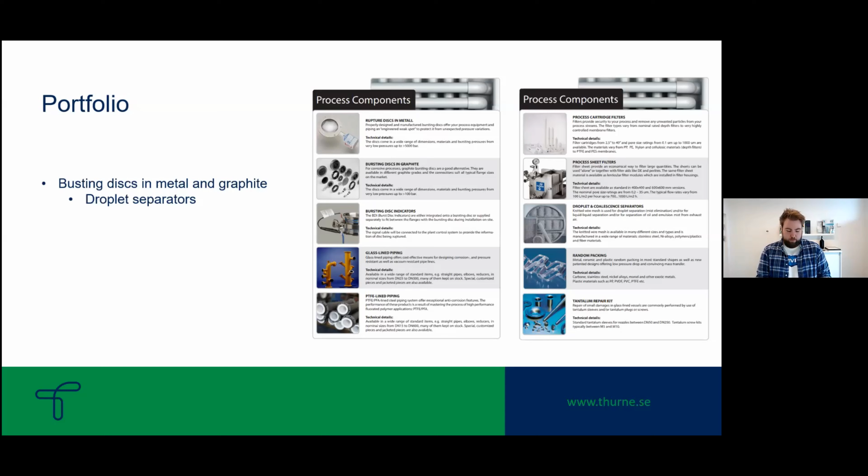Also something about how Thurne works, or how we work at Thurne, since I'm a product sales manager. I usually have a project with the customer, or the customer comes to us, or the supplier comes to us, and has some questions, some problems that need to be fixed. Just something that will need expertise in different areas. And then we are perfect for that because we are the experts in these areas.

So we sit down with either the supplier or the customer. We work out the identification of the problem. Then we can find the definition and criteria of what we want to achieve. What is the goal here? What is the purpose? And after that, I will work together with the supplier to find a solution. And in my experience, this solution usually needs a revision from the customer. And then it's ready to be shipped to use.

And also we get feedback later on, if it was a good solution, or it needs to be changed, or if we need to copy and paste this on some other parts of the plants. So moving on to our first supplier. We're going to talk about CDC, the Continental Disc Corporation. They were founded in 1965, and it's an American company. They're located in Kansas City, Missouri, even though they have plants all over the US. Their headquarters is in Kansas City.

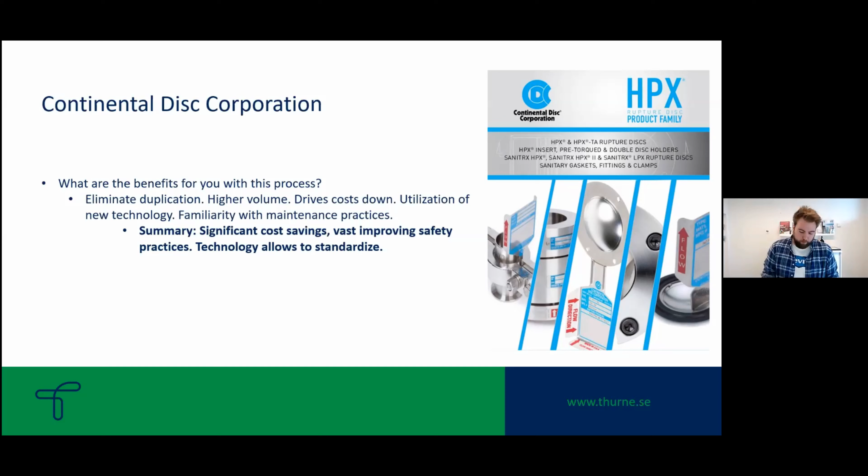So not just standardization with cost savings and improving the safety, but also very specific cases where we can make a special design just for this position to really get the high safety and a good value for the product. So let's move on to some of the case studies. So the benefits of this process usually end up in a better solution, or a higher volume of discs that will drive down the price, and utilizing new technology.

And this is a good way of showing the different types of technologies that can be implemented, and also customized technology. All of this just to make the safety better, to make the cost savings better, and also save lives. So this was for one of our customers. We developed a special disc where they had a hard time fitting it on the connector, the ML Connect, which was sitting on the tank for the batches.

And in 9 out of 10 cases where the disks rupture too early, it's usually how it's mounted. So if we could find a good way of mounting this disk, it would be much easier for the customer to install the disk. It will be a good seal, a good fit. It will work longer and longer, since this type of disk will work around 3 million times before bursting. So you can do 3 million cycles with this disk, and it will still keep 95% of the operating ratio.

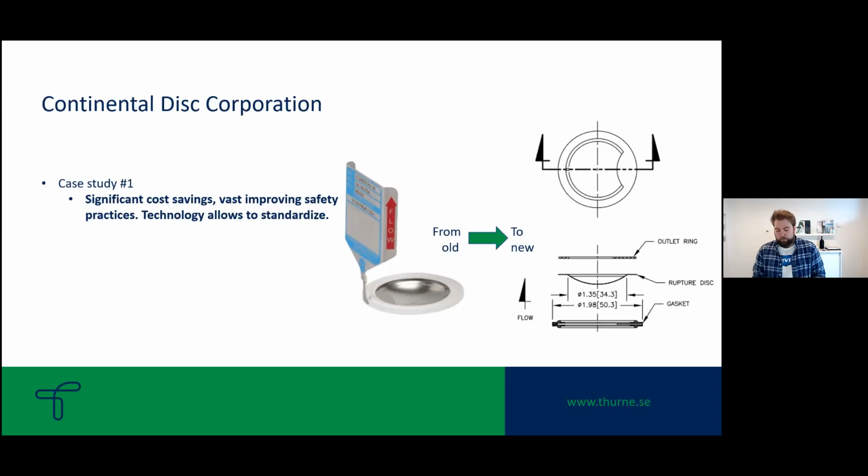So in conclusion, we developed a unique disk which met the criteria the customer had. They wanted to improve and last for 3 million cycles. They also wanted to have an ease of installation, which is also a criteria which HPX is great for. And in the end, it was about money as well. They saved a huge amount of money. Several batches were not ruined. It was fast for them to replace a disk if something broke down. And the customer was actually very happy with this solution.

We look at another one. This is more of a unique one. This is also a sanitary disk, very similar to the old one. But we did have some unique cracks in the disks. Actually, no one believed me when I told CDC that, yes, I have this customer, they have this problem, this is the criteria, they need to fix it. What are the solutions we can provide? And we chose to call it micro cracks because this is the first time ever. It's so unique. There's no other in the world, as far as CDC and others know, in this industry.

But there are small cracks. You can't see it with the naked eye, but if you hold it and look through a light and you poke it, you will be able to hear it, and you will be able to see small cracks. And this happens with CDC disks, this happened with our competitors' disks, so it's industry-wide. They have chosen different manufacturers, trying to nail it down to find something better. And this is an ongoing investigation, actually, on how we can make a disk that won't crack with such small amounts that it's leaking, more or less.

So you want it to be sealed and you want it to be fully open. You don't want it to have small cracks to leak, because that's not the best solution for a disk either. Then you can have a valve or something else. And since this is sanitary, it could be really dangerous for the end user if it's not sanitary.

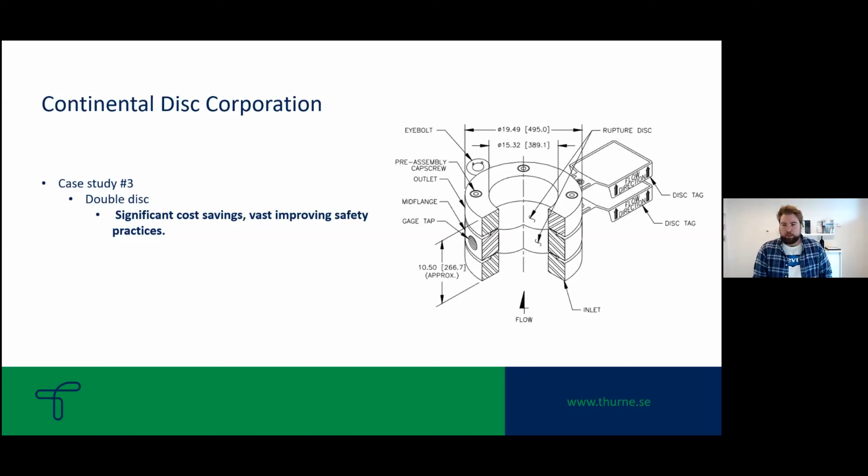We had the revision. It wasn't really a good one. It was old technology. The customer wasn't really happy, CDC wasn't really happy, and we at Thurne weren't really happy. So we sat down, had another meeting, and came up with this solution. So this is much better technology, much newer technology, better for cycles. They will last a lot longer than what they currently have. And it's a reverse acting disk, so the cycles will last more than 3 times compared to the old one. But that's the case study of those 3.

So again, why partner with CDC? Hopefully I've been able to show you why you should partner with CDC, with the case studies, and also what could be interesting in the HPX family, with the new standard in the industry. So case studies have shown that they've got the technology advantage compared to their competitors. They are leading today in rupture disk manufacturing just because they've got the technology.

And when you look at the disk, it might not be that interesting. It looks like something that you could just put on and like, yeah, it will go at 3 bars or something like that. And yeah, if it goes a little bit over or under, sure. That might be true for some positions, but you still need reliability. You still need a good seal. You still need a good solution, basically, in order to grow your business over time. And with bursting disks, it has shown in the past, and it will show in the future also. We're very sure about that.

If you choose a good disk, and if you have good ways of implementing it at your plant, your business will grow, and you are able to compete with your competitors way better than not having a good disk, a good implementation, good technology. If you have old technology, you need to have new technology to meet the new standards, the new regulations from governments, from companies in the industry. So technology is something that should not just be overlooked. It's something that you really should prioritize when it comes to bursting disks.

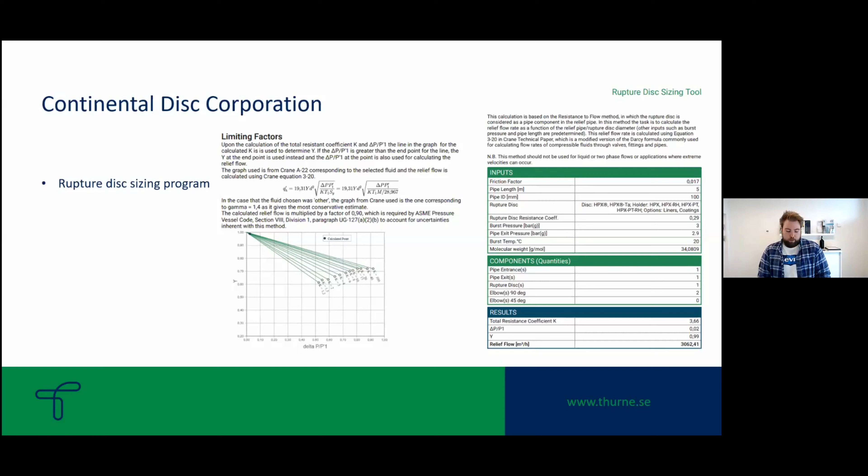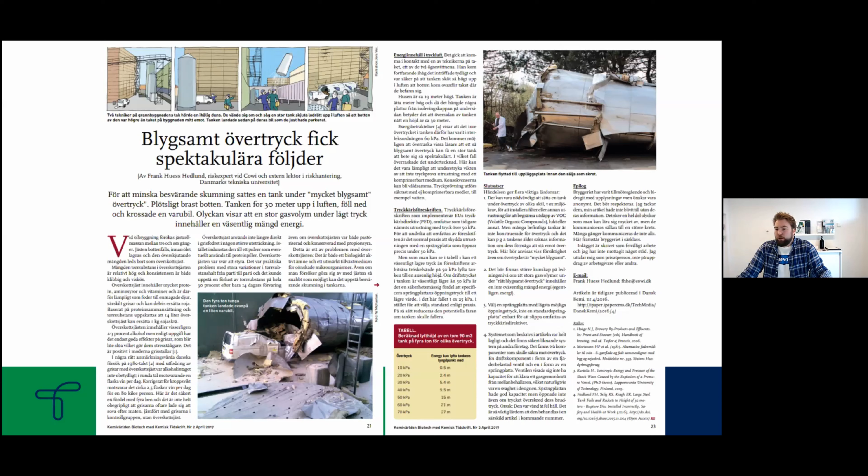Moving on to the next supplier, leaving CDC behind, moving on to Rhodius, which is the next supplier. Rhodius will be talking on the third day, on Thursday, and then you will talk to a person named Terry, and he will go through everything they do. The scope of Rhodius is really, really huge, so I will just briefly go through what they're doing and what they are, if you haven't heard of it.

This will be your first time, but they are really huge in the wire mesh industry, and the applications for wire mesh are endless, really. So to begin, in the 20s, it's a German company, and they have been with Thurne for a very, very long time. This is one of the oldest suppliers we have worked with.

So a lot of my colleagues that have been working here for 15, almost 20 years, describe it a little bit like a sacred cow for us, because we have worked so long with them. They have really been able to deliver every time. So our contract just keeps getting better and better, and we start to expand more and more on it.

So the cooperation between Thurne, the customer, and the supplier has really been close. We have a lot of old customers that have switched to Rhodius and never gone back to anything else, and kept it with Rhodius or expanded at their sites. So a quick one, what is Rhodius? What do they do? They were founded in 1925 in Weissenburg in Germany by a man named Max Rhodius. A similar story to Thurne, actually, that there was a man called Thurne who founded it.

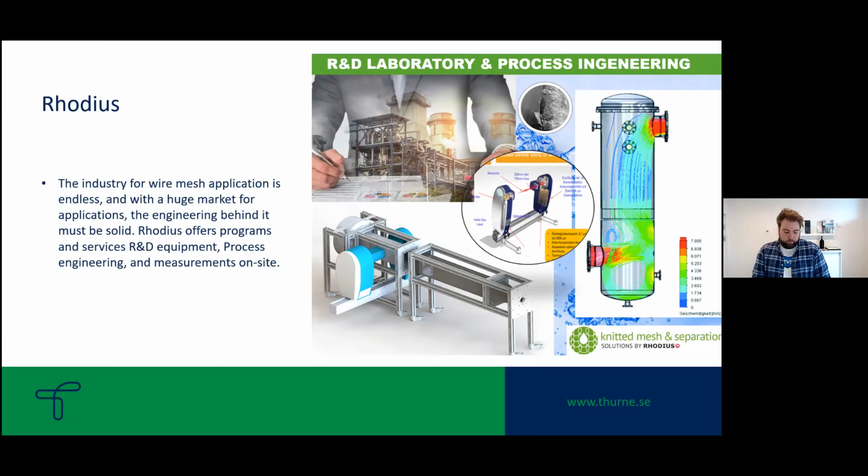So quickly, what they are doing: they do wire mesh technology, and you can implement it in so many ways. Knitted mesh in industrial textiles, on the left, for example, you can fit it on subway trains to minimize vandalism, theater seats, stuff like that. You can also have tubes with them, so you can do pipes, lines, copper cables to shield them from noise and radiation. Something that is more common for Thurne is the gas and liquid separators.

Hopefully you recognize this. This is something that sits on top of almost every column out there on the plants today, because almost everyone has a scrubber or absorber of some sort where they want to separate the gas and liquid from each other. So this is something that we sell a lot, put on top of every column, and it's one of the case studies I will show later.

Same practice as with the gas and liquid, they do liquid and liquid separation. So this is good for refineries, for example, that we have here in Sweden and Norway. Also other chemical plants, fine chemicals, that really need vast amounts of volume and need it to go fast. Then you can't wait for the laws of gravity to do the work for you.

You need to push it through some sort of filter, and they have the technology to do that. Mist eliminators are something that will be very common in cars, for example - it's the cartridges where you can slot in.

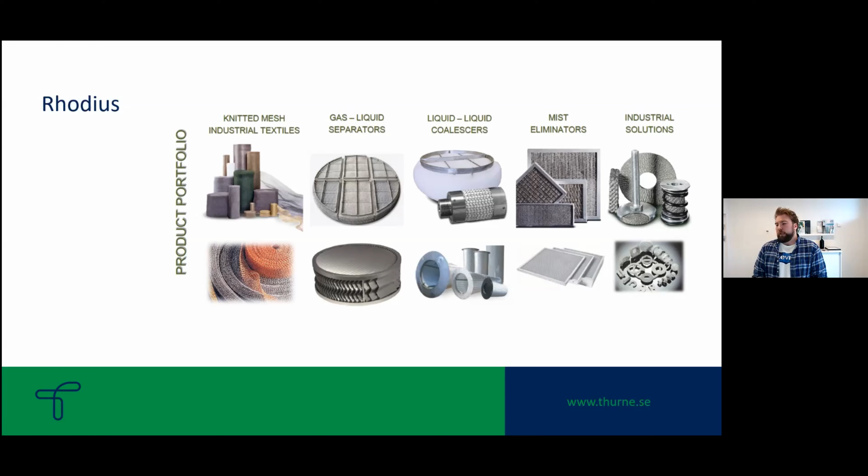So it could be applied for absorbing, heat isolation, everything you need on small parts on your plant, in your process, that could be very vital, that needs to function very well in order to get the whole system to work. And that is also something that Rhodius will provide. So they will look from this little component and widen the spectrum: if we place this component here, how will the whole system work? How will the whole system act? Which is something that they are really good at.

Case study. This is the first and only case study I will talk about with Rhodius. So this was for a customer of ours. They are planning to make it more efficient and also add a few new positions as well.

We did some simulations. We did a few different modifications, examples to show if you place this, it will be better at this or worse for this. So the customer understands what they're buying and why they're buying it.

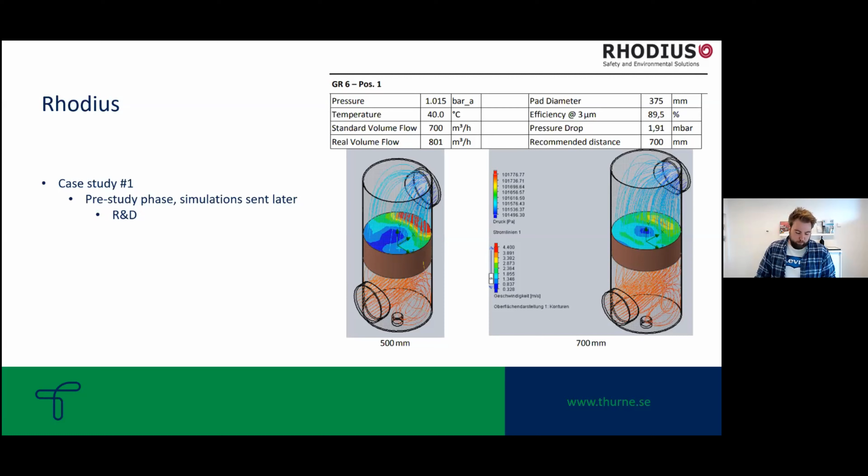So in a recap, what Thurne is, what Thurne does, the sales agency. We have talked about what we are, what we do, how we fit into the market. We have been talking about one of our suppliers, Continental Disc Corporation, CDC, about the bursting discs they have.

We have talked about the HBX product family. We have also talked about what type of value CDC can bring. They can vastly improve the technology, they can vastly improve the cost savings and the security and safety of not just the equipment, but also the people that work there. Because after all, it's safety of equipment, and if you have safe equipment, you will save lives.

So that is what we are doing. We have also talked about Rhodius, also what we have achieved with Rhodius, a little bit of what they're doing - a light touch, because it's so wide, the wire mesh technology they're doing. You can fit it anywhere you didn't think, you can see it everywhere where you don't believe it was. So if you start looking and have a good eye, you will find out that wire mesh technology is something that you will find everywhere.

So these two suppliers, Continental Disc and Rhodius, will have their own separate session. Tomorrow there will be Continental Disc Corporation having a session, and on Thursday it will be Rhodius - we'll go through their own. Then you will have the opportunity to actually speak and ask questions directly to the supplier. If you have a quick question, or if you have some products you sell or something that you need help with, that will vastly improve by beginning a project or doing some pre-studies, or just having an easy way of telling what they are buying and what we need.